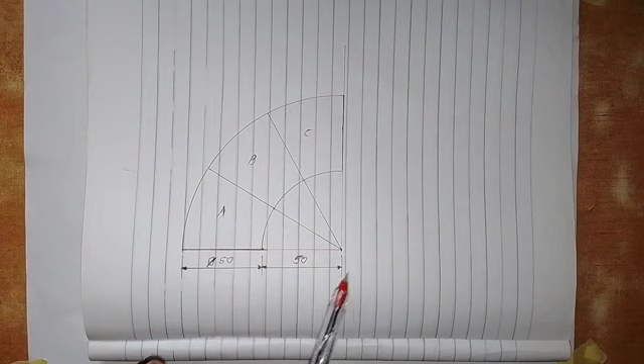I got this question from one of the platforms that I belong to, and we are asked to develop this part of the pipe using the radial line method. I'm going to show you how to work this out, and then we work out the surface development as we're asked to develop this part of the pipe, that is part B.

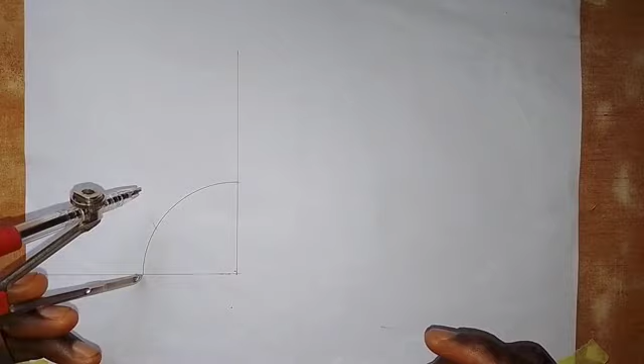So just for the arc to meet the vertical line. The next thing I'm going to do is trisect this arc. To trisect it, I will put the pinpoint of my compass at this point on the vertical line and make an arc here. Then I will also take the same radius, using the radius of this arc to trisect it, putting the midpoint here and also making an arc at this point. So we have trisected it.

As I said, the distance from here to here is 50, and that is the 50 we used to draw this arc. Then I'm going to add this 50 millimeters and this 50 millimeters together, making 100. That's the next thing I'm going to do so I can draw this particular arc. So I will take a measurement of 100 millimeters, so this is 100 millimeters here now.

So this is 100. I will put it at this point here, at this point. Then I will draw an arc from here to meet this vertical line. So we have the arc drawn.

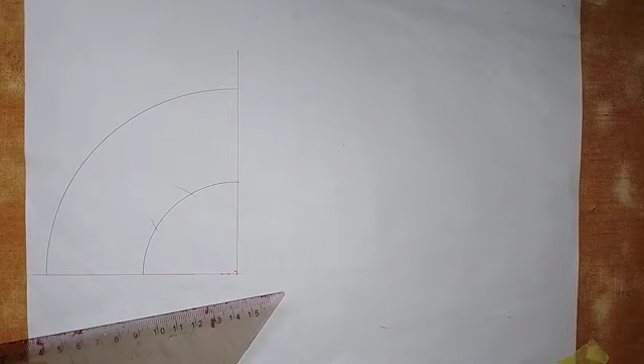The next thing I'm going to do is make this line from here to here a thick line. Then I will also make this line a thick line from here to here. So we have the pipe drawn.

Then to bring out parts A, B, and C, we are making use of this point here. So I will draw a line from this point - let me call this point O. So from point O, I'm going to draw a line through this point that we have on this small arc, so it goes like this.

Then I will also draw from here, from point O passing through this arc here, so it goes like this. So here we have this is part A, or piece A, and this is piece B. And here we have piece C.

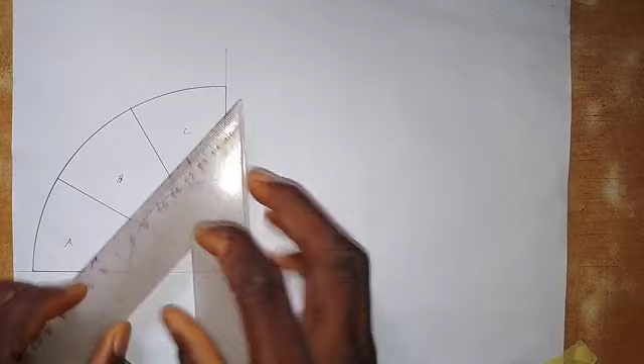The next thing to do is draw this arc for part B, which we want to make its surface development. So this arc here on part B, let me label this point - let me call it point P. And this point here, let me call it point Q.

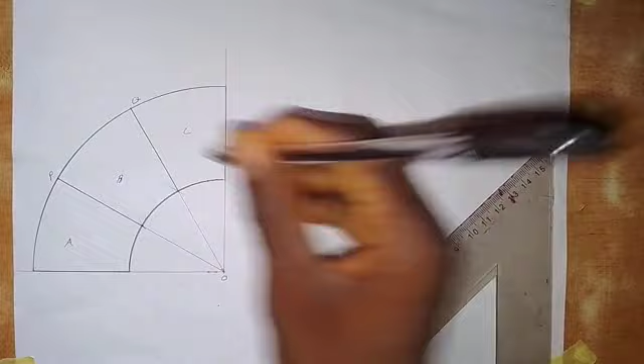So we are going to draw a chord of this arc, meaning we connect point P and Q together with a straight line, joining them like this. The next thing we are going to do is bisect PQ, so you'll see what I do with that.

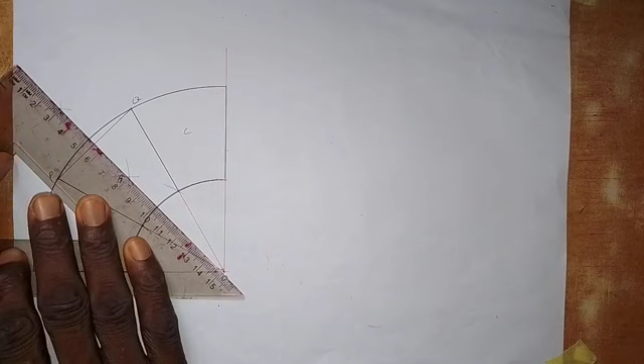So we are going to bisect PQ. We want to get the midpoint of PQ. With my compass like this, I will draw an arc here, then putting at this point of PQ, I'll draw an arc here and another arc here. So I'll be able to get the midpoint of line PQ, called PQ. I'll just have this point as the midpoint, and I've marked it there.

So the next thing I'm going to do is construct a semicircle on PQ. With the pinpoint of my compass at this point, I will extend to Q, and to P here, here and here, so I will draw a semicircle like this.

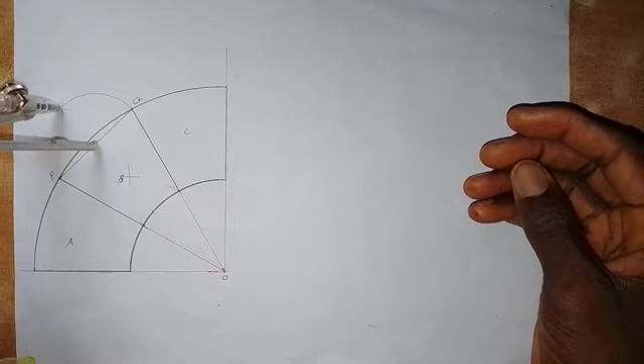Then I want to divide this semicircle into 6 equal parts. So I put the pinpoint on my compass here with the same radius, put it here and make an arc, then I'll put it at this other point and make an arc.

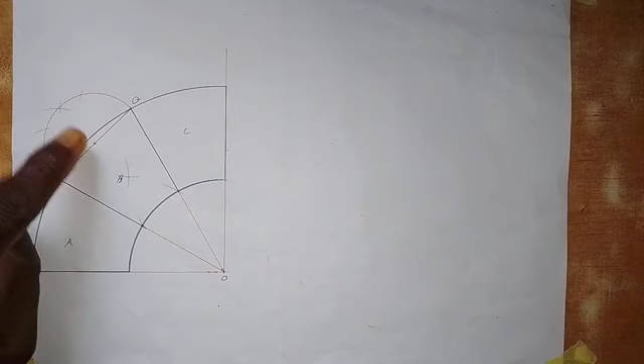Then I need to get another point here, which is the midpoint of this semicircle. To do that, I will connect the midpoint I have on PQ together with point O here, and it will meet the semicircle at this point. So I have the midpoint of the semicircle.

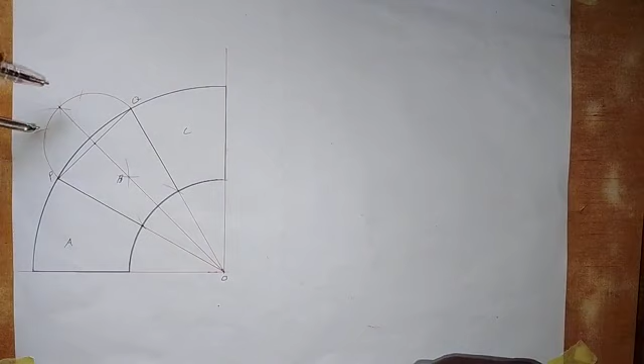So the next thing I'm going to do is take the same radius I used to construct the semicircle, which gave me this point and this point of the semicircle, and put it here. Put the pinpoint here, then make an arc here and here.

So with what I've done now, I will connect this point together with this point. This point also I will connect together with this point, and also this point I will connect together with this point. Also this point I will connect together with this point.

Having done that, I'm going to number these points. This is point 0, this is point 1, this is point 2, this is point 3, this is point 4, this is point 5, and this is point 6.

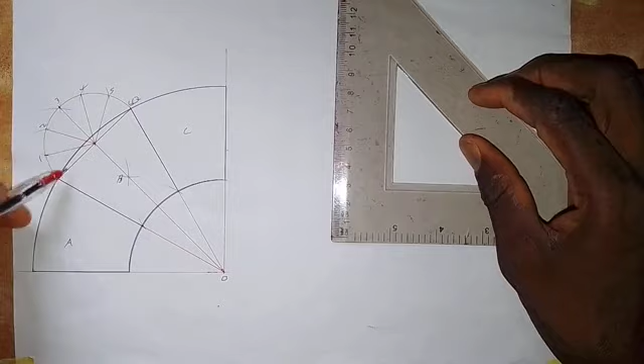So the next thing I'm going to do is connect every point on this semicircle together with point O, with a straight line. Connecting point 5 with point O, I will draw a line like this.

Then point 4, I will draw a line like this. Then point 2, I've already done point 3 as the center of the pipe, so here I will draw this, connecting it together with point 1, and I will also draw and connect it together with point O here like this.

Alright, so we have this. So the next thing that we are going to do is carry out the surface development. That's the next thing that we are going to do.

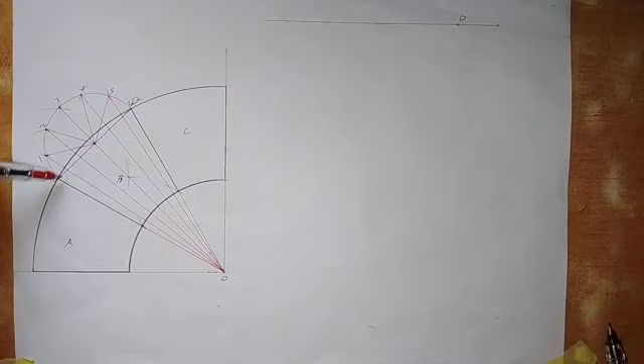So it's very simple. What we need to do now is come up like this, and I'm going to draw a horizontal line here. I'll be taking this point here to serve as point O. This thing we have here is a cone, and this is the curved part of the cone, the circular base of the cone. So this part that we have here, that is this arc.

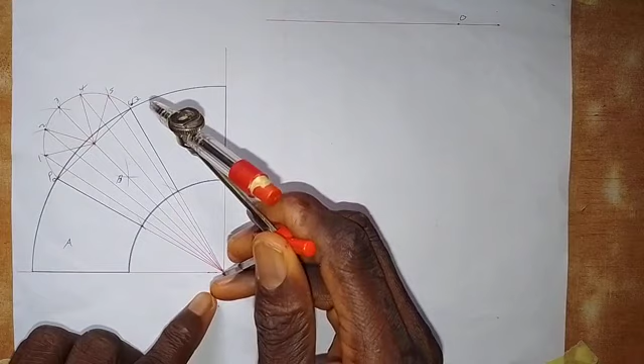So what I will do now is take my compass and take the distance from this point O, extending it to point Q here. You know that when we drew this arc, we put it at point O and took the measurement of 100 millimeters. So if I put it at point Q, I will get it. If I put it here in the middle, I will still get the same thing.

If I put it at this point P, I'll still get the same result. So I'll just take it here, point Q or point P, whichever I like, and put it at this point O here. Then I will draw an arc, draw an arc like this.

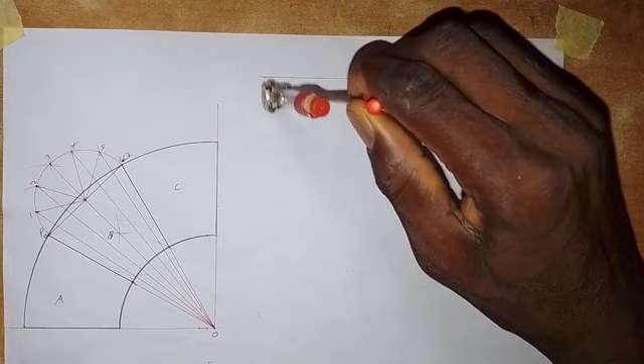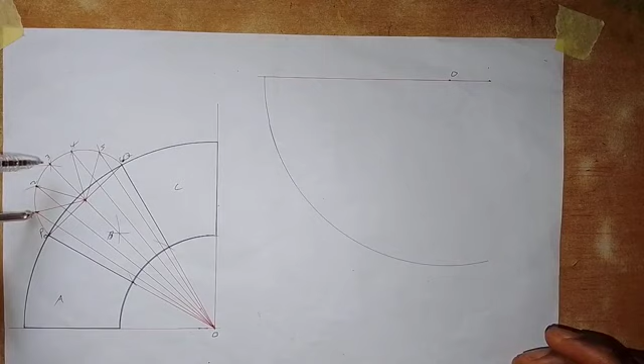So with this arc that I've drawn, let's leave it like this for now. Next, I'll take one part of the arc on the semicircle, any one I like. I'm taking from 0 to 1, though I could take from 0 to 2. This is the initial point, point O. Don't forget that this is a pipe.

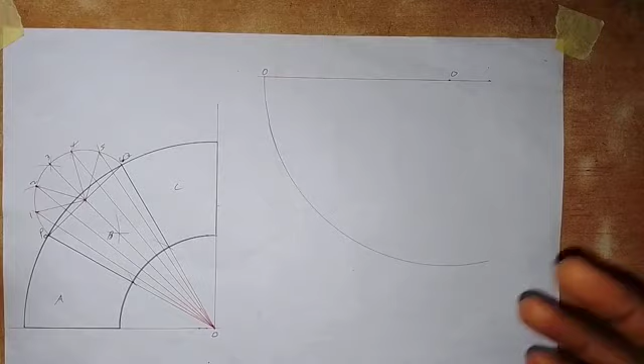Normally if we've drawn a circle, we divide it into 12 equal parts. So we are going to make 12 arcs on this big arc here, using the radius taken from 0 to 1.

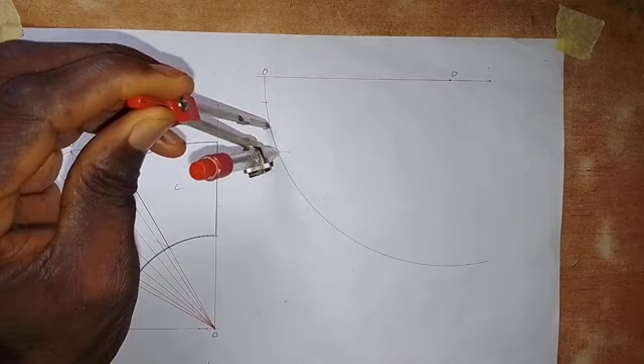So I put the compass at this point and make an arc here. This is 1. Putting it at this point, this is 2. Then at this point, this is 3. Putting it at this point, this is 4. Then here we have 5. And this gives us 6.

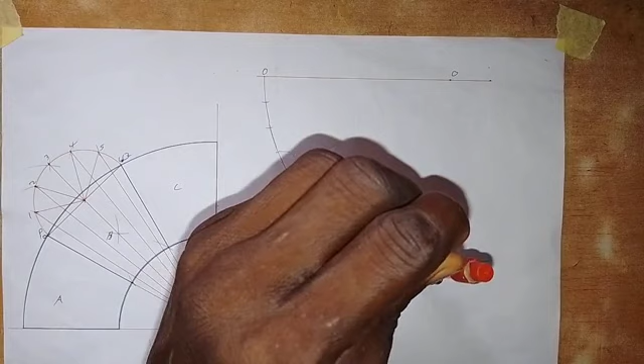So this is 7, this is 8. Then we have 9, this is 10, this is 11, and then the last one, 12. So we got it here.

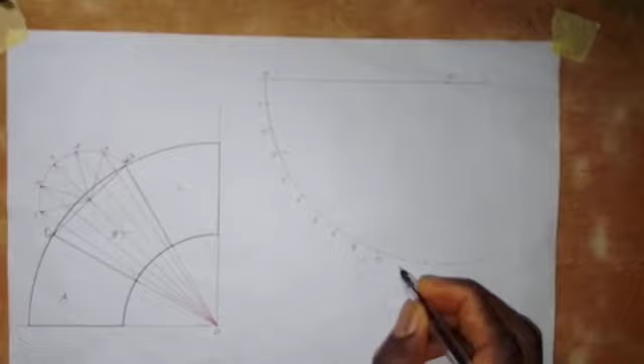So next, I'm going to number each of these points: this is 1, 2, 3, 4, 5, 6, 7, 8, 9, 10, 11, and then 0. We move, though we are not given a particular part for the seam, so we are using any parts. Either I use this part or that part, it is still the same, so we don't have to worry about that.

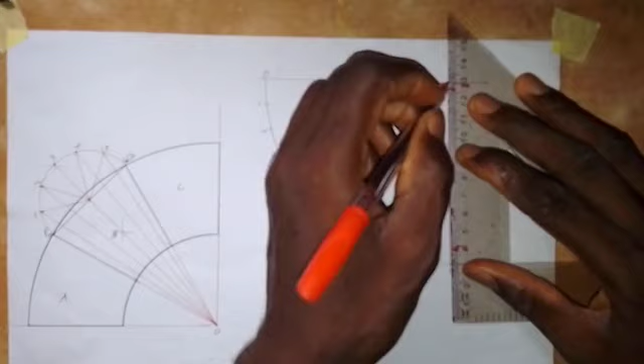What I need to do now is connect this point to point O. I'll draw a line from here, connect it with point O, and then this point also I will connect with point O here. Let me pause the video and do the rest.

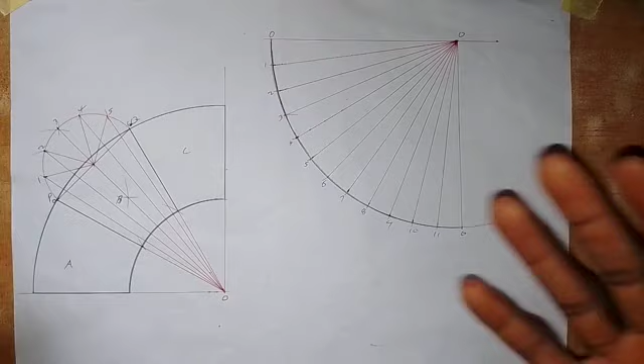Alright, as you can see, I've drawn the line. So the next thing we are going to do: this arc from 0 to 0 is the curve on the circular base of the pipe. It becomes a cone now, so for this part B, this arc we have here is the curve on the circular base of the cone.

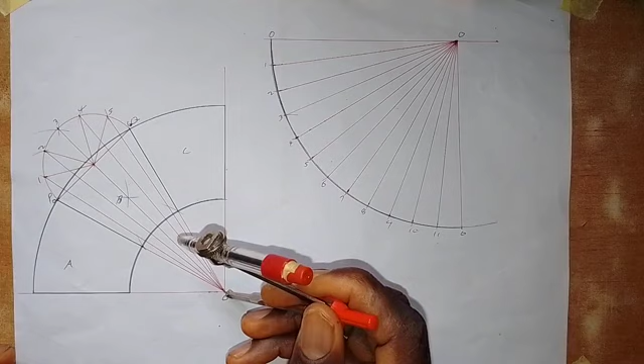Next, we are going to get the upper part. You just need to put the pinpoint of your compass here and take this distance, 50 mm. Distance from here to here is 50 mm, distance from here to here is 50 mm, so the radius is 50 mm. Just take this 50 mm at once, like this.

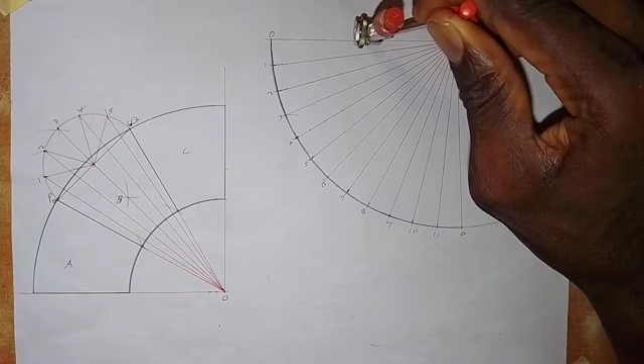If you draw it, we're going to have the same thing. Put it at this point over here, put it at this point over here, and draw an arc like this. So you just draw an arc, as you see it there.

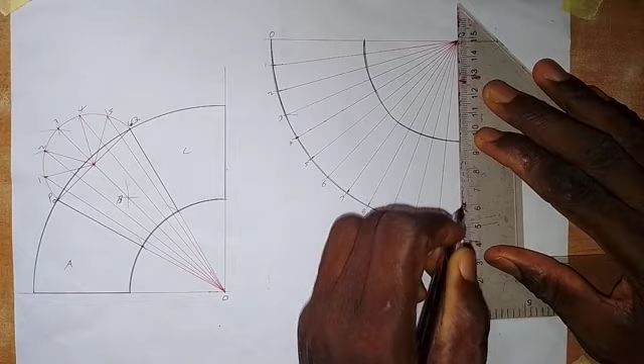Having drawn the arc, to finalize our work, as you can see this edge here is a thick line and this edge is a thick line. So what we need to do now is make this line here on the 0 a thick line from here down like this, and then we also make this a thick line, from here to here.

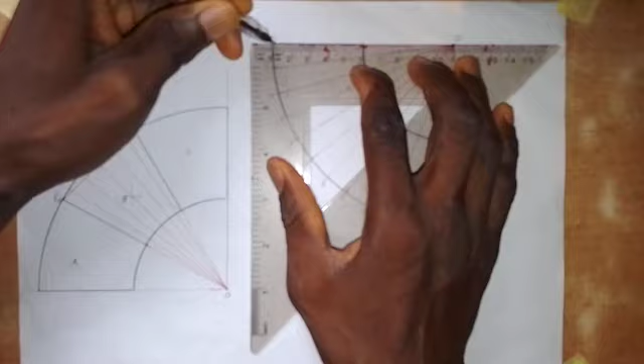So this is the surface development of piece B, as we are instructed to draw the surface development of piece B using the radial line method. Thank you and God bless you.